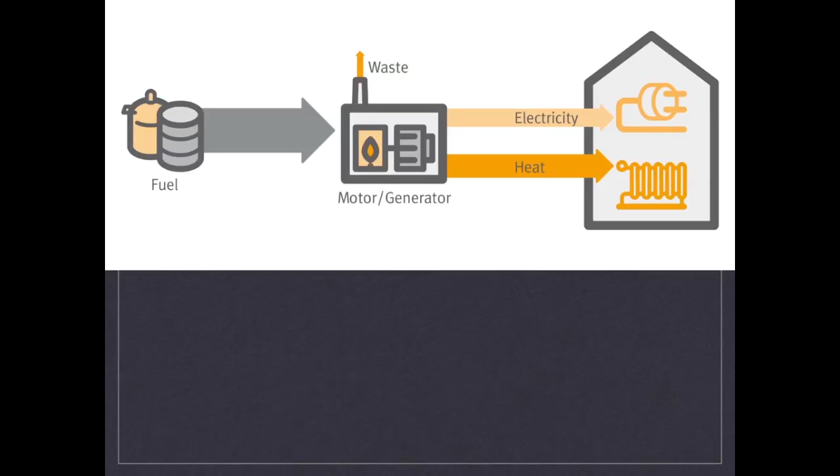An introduction to combined heat and power technology, with a focus on stationary fuel cell application. What is combined heat and power?

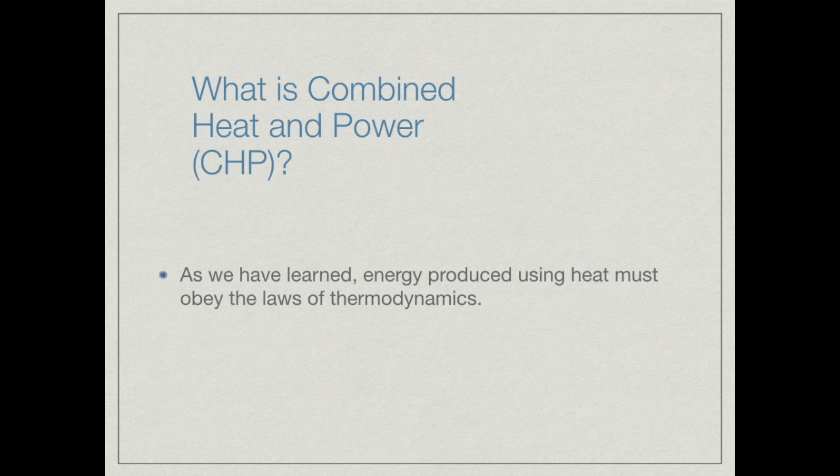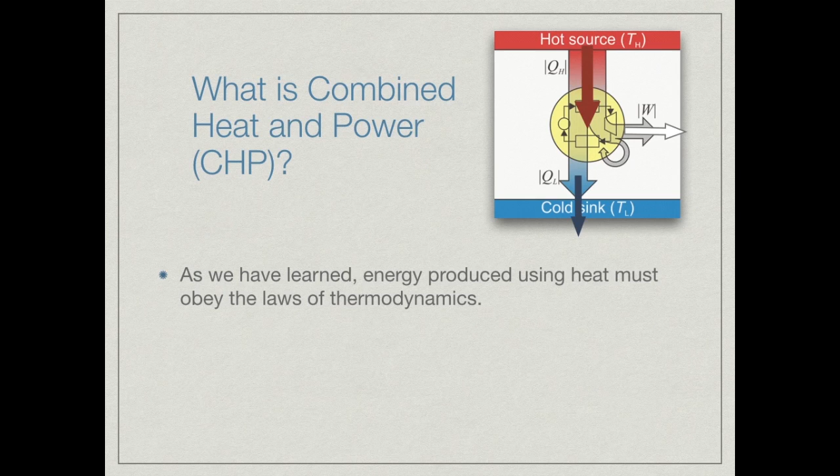As we have learned, the second law of thermodynamics states that the total entropy of an isolated system can only increase over time. Basically, as energy is transformed or transferred, though the total quantity remains the same, more and more of it is wasted. An extremely simplified heat engine is shown. In a heat engine, this means there is an important measure, efficiency, which measures how much of the input energy ends up doing useful work.

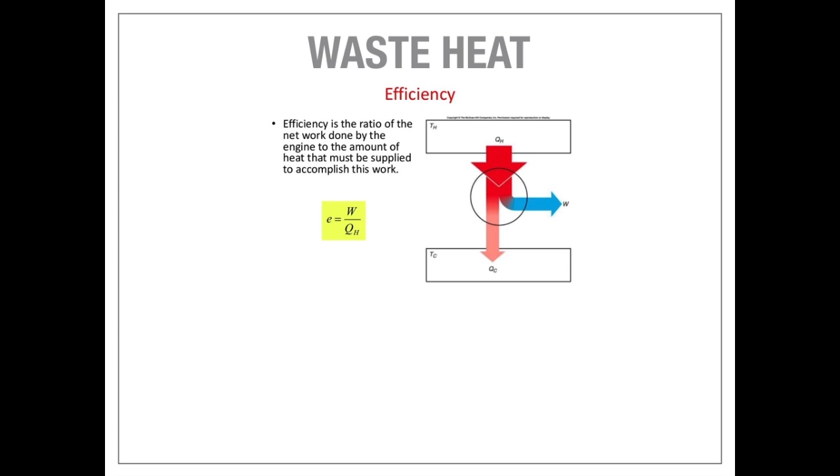The equation for this is shown. As you can see, the efficiency goes up the greater the temperature difference between the hot and cold sink is. Unfortunately, engines can only be so efficient and much of the energy is wasted. But what if it wasn't? This is where the idea of cogeneration and combined heat and power technology comes in.

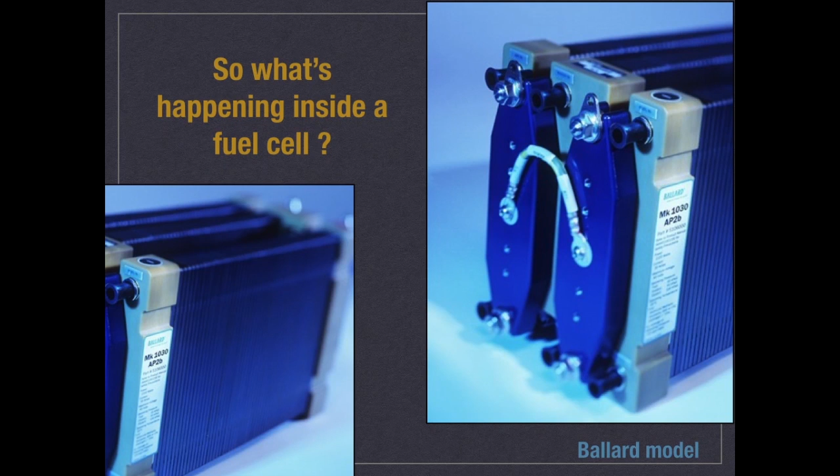Micro combined heat and power, or micro CHP, is the use of cogeneration on a small scale. There are 5 different electricity generating technologies: microturbines, internal combustion engines, closed-cycle steam engines, Stirling engines, and fuel cells. The first 4 can use fuel like propane, but we will focus on the fuel cell to maximize the sustainability of the system. So what's actually happening inside of a fuel cell?

Well, as the fuel cell inventor William Robert Grove would say, you need natural gas or biogas, CH4, which has to be first turned into dihydrogen via the SMR, steam methane reforming, technique. You need oxygen, O2, a catalyst such as platinum, and an electrolyte, which varies depending on the amount of electric power you are looking for.

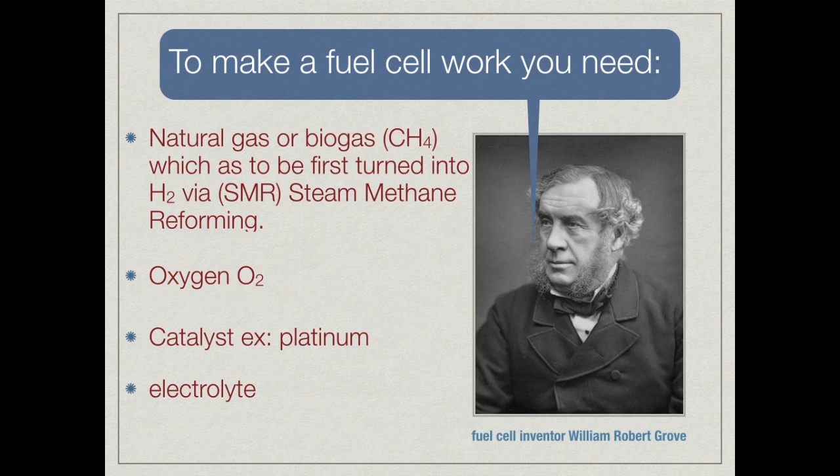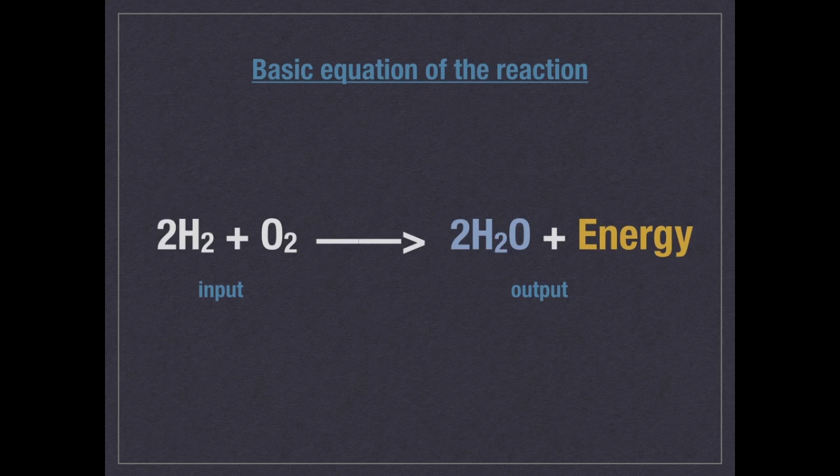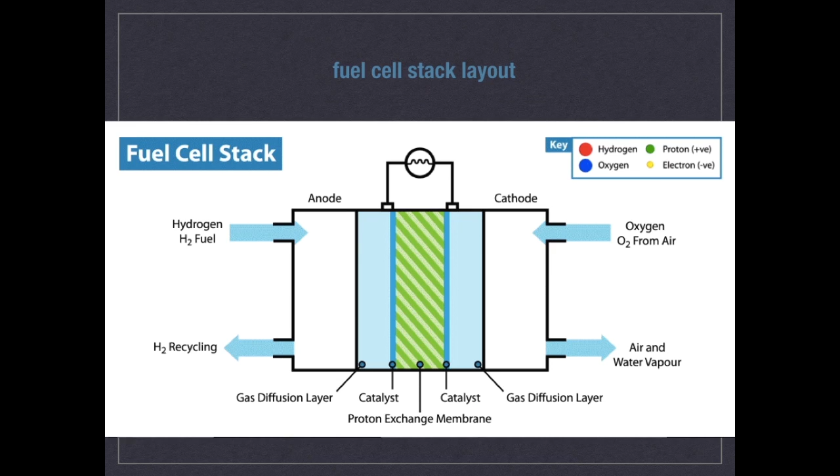The cell layout is divided in 3 major parts: the anode, the proton exchange membrane filled with the electrolyte, and the cathode. In the anode, in contact with the catalyst, the dihydrogen separates into electrons and protons. They then reform the dihydrogen in the cathode to bond with the oxygen and create heat and water. Only protons freed by the catalyst can pass through the exchange membrane.

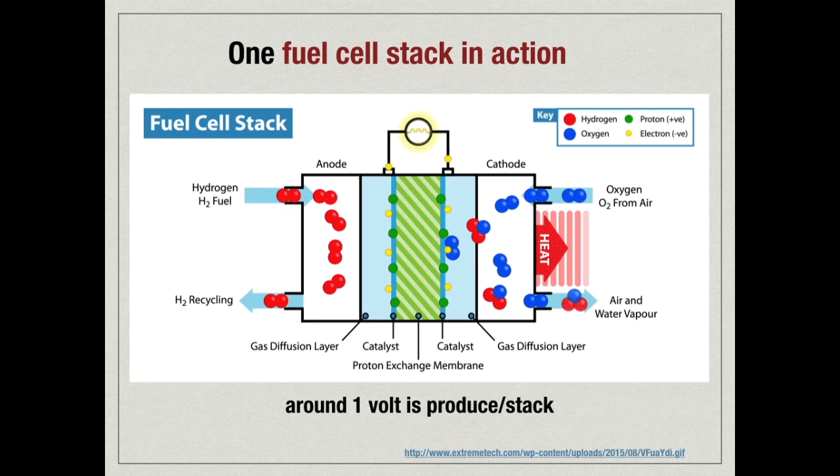As you can see, to reform the dihydrogen, the electrons have to travel through the electric line and produce electricity. And then, when they arrive in the cathode, they meet the catalyst. Depending on the electrolyte used, one fuel cell element provides around 1 volt, but stacked together, the total voltage is around 300 V.

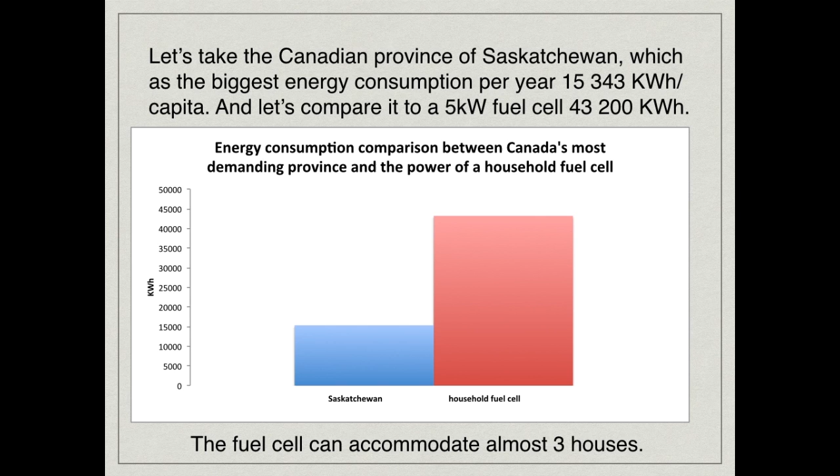Now, let's take the Canadian province of Saskatchewan, which has the biggest energy consumption per year, around 15,000 kilowatt-hours per capita, and let's compare it to a 5 kilowatt fuel cell. As you can see in that graphic, the fuel cell can accommodate almost 3 houses. One fuel cell is also capable of producing up to 16 million joules per hour at 60 degrees Celsius.

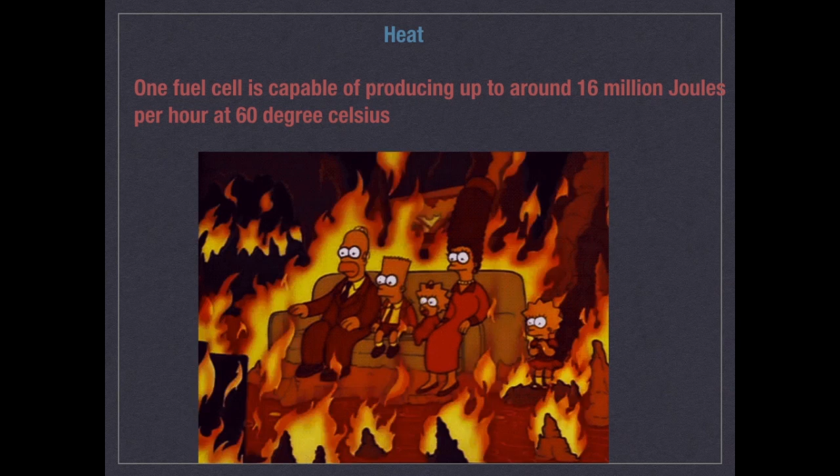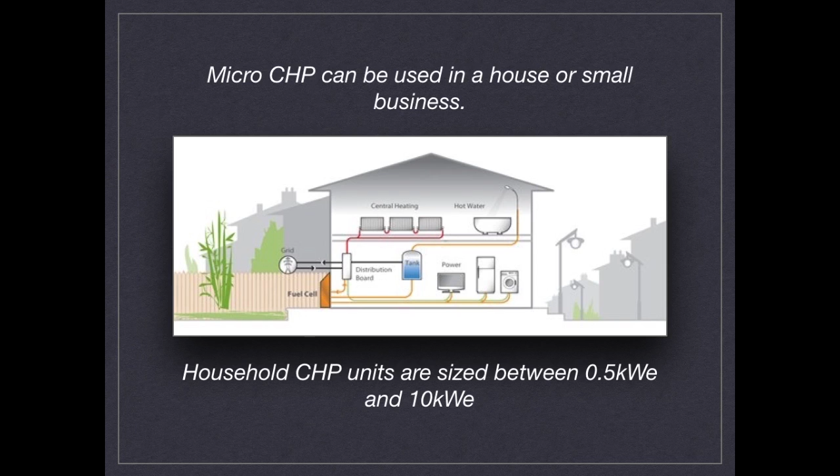Micro CHP installations can therefore be used in a house or small business, and household units are sized between 0.5 kilowatts and 10 kilowatts. Fuel cells can raise the CHP unit's efficiency as high as 80 to 90%. They can operate without noise, produce no harmful exhaust, expel no breathable particulate matter or discernible smell, and they can blend in with other household appliances.

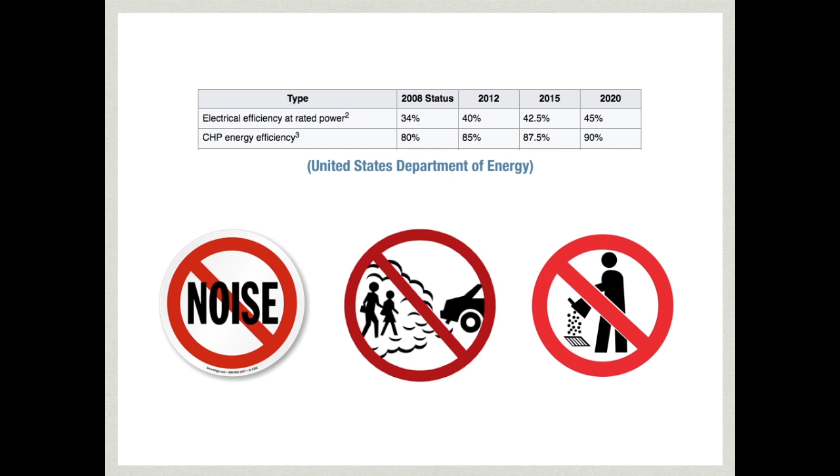In remote locations, micro CHP fuel cells can be an excellent source of on-demand backup power as they operate 24 hours a day. One of the downsides is that for now, systems have a high initial cost, ranging from around 30,000 to 70,000 Canadian dollars.

However, over the past few years, the United States Energy Administration has reported the declining prices of fuel cell units due to factors such as technological advances, favorable incentives and policies, and the general interest in low emission profiles and distributed energy. With this comes the increase in use in multiple applications, and it is our hope that with this comes the further expansion into both the private and public market.